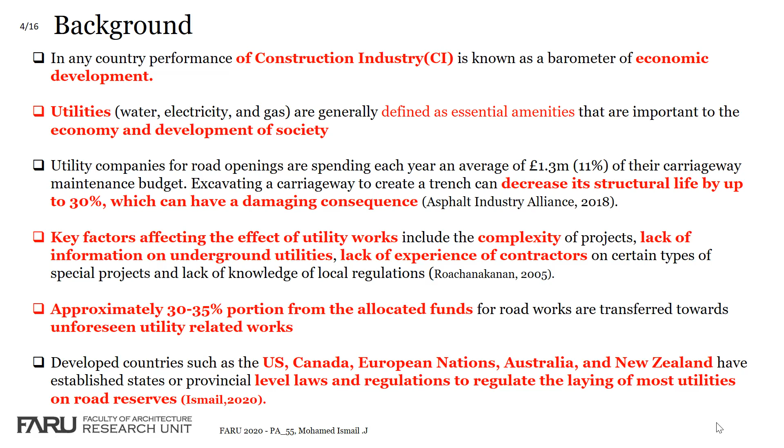Developed countries such as the US, Canada, European nations, Australia, and New Zealand do have well articulated laws and regulations to regulate the laying of most utilities on road reserve. Research problems: road projects are experiencing huge delays in Sri Lanka due to utility relocation, design changes, price escalation, and land acquisition. We are going to discuss mostly the issues with utility relocation and betterment works in this presentation.

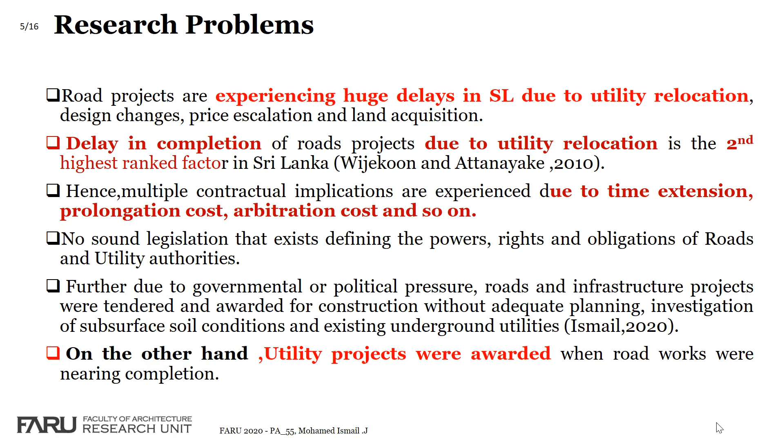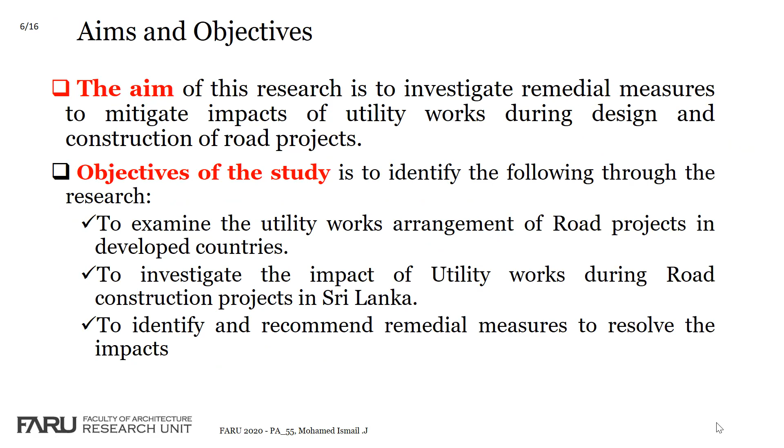Aims and objectives. The aim of this research is to investigate remedial measures to mitigate impacts of utility works during design and construction of road projects. Objectives of the study: firstly, to examine utility works arrangements of road projects in developed countries. Secondly, to investigate the impact of utility works during road construction projects in Sri Lanka. Thirdly, to identify and recommend remedial measures to resolve the impacts.

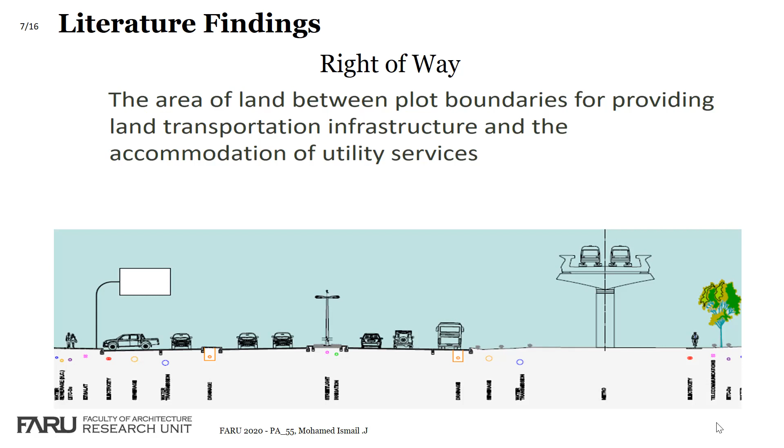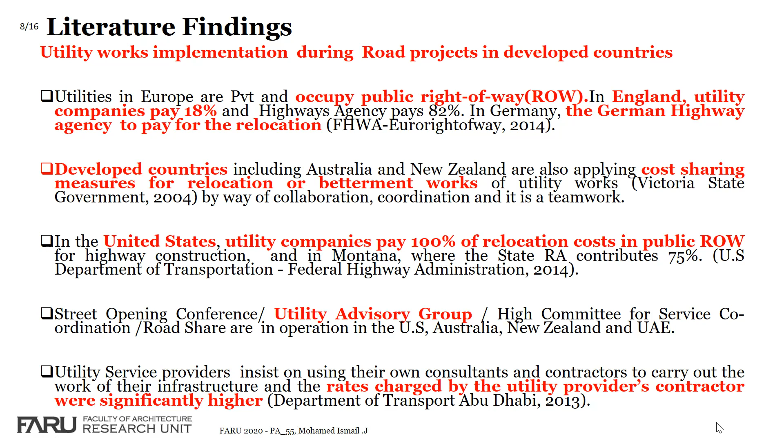They meet at regular intervals and discuss design and construction conflicts between utility and road projects. By doing so, they resolve many issues and end up in a win-win situation to complete the projects well on time within their budget. Utility service providers also sometimes insist on using their consultant contractors to carry out the work instead of road contractors being given to execute, and their contractors charge utility providers significantly higher than the rates of road contractors.

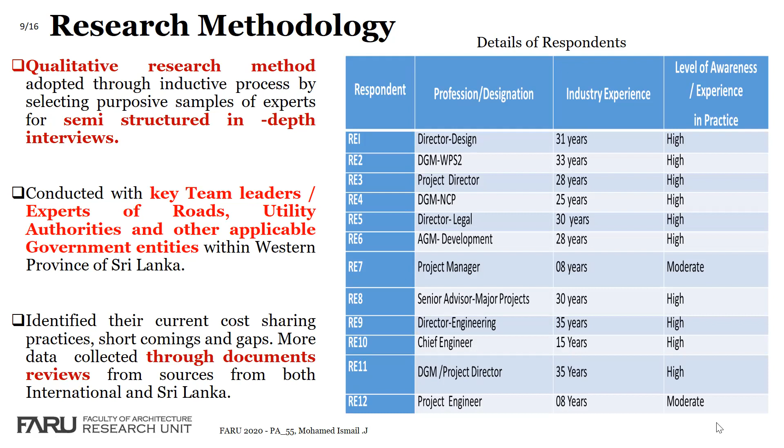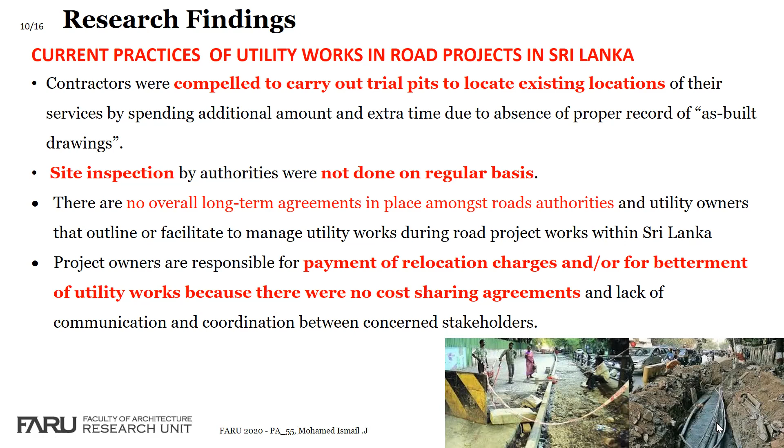Research finding, current practices: contractors were compelled to carry out trial pits to locate the existing location of services because as-built drawings were not available on most occasions with the utility agencies. Site inspection by authorities was not done on a regular basis. There is no overall long-term agreement in place among the road and utility authorities. All they have is an ad hoc agreement, which is not resolving the overall issues, and it is a time-consuming affair as well. Project owners are responsible for payment of relocation charges and or betterment of utility works because there was no cost sharing agreement and a lack of communication and coordination.

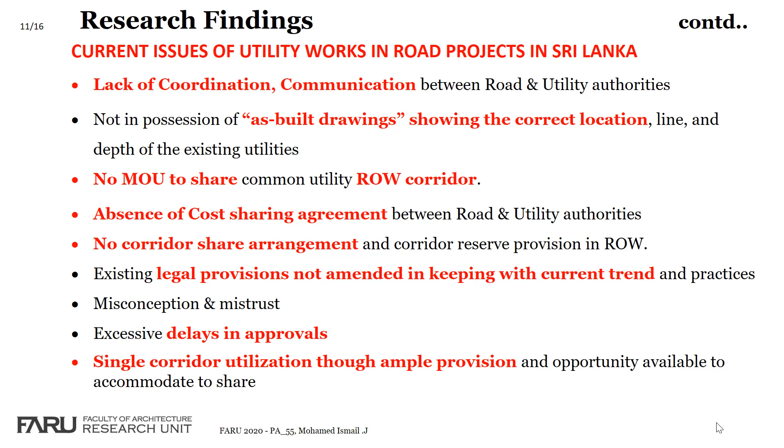Single corridor utilization though ample provision, which is in Japan: we have a single overhead pole which provides overhead electricity and street lighting cables and sometimes telecom cable also. So that is common corridor sharing, and utilities have coordinated their works in an accepted manner.

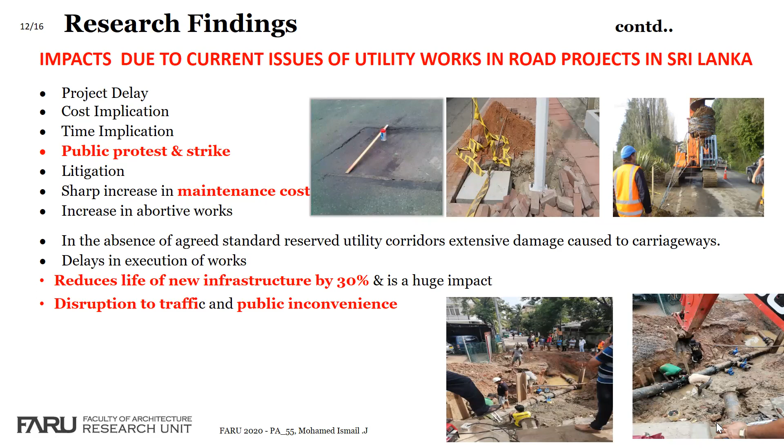Impacts due to current issues: project delay, cost implication, time implication, public protest and strike due to environmental and land acquisition matters, litigation, sharp increase in maintenance cost, and in the absence of agreed standard reserve utility corridors, extensive damage caused to carriageways, delays in execution of work, disruption to traffic, and public inconvenience.

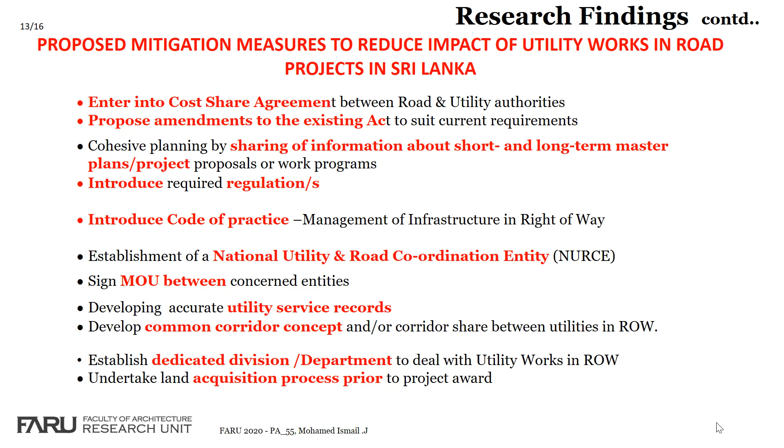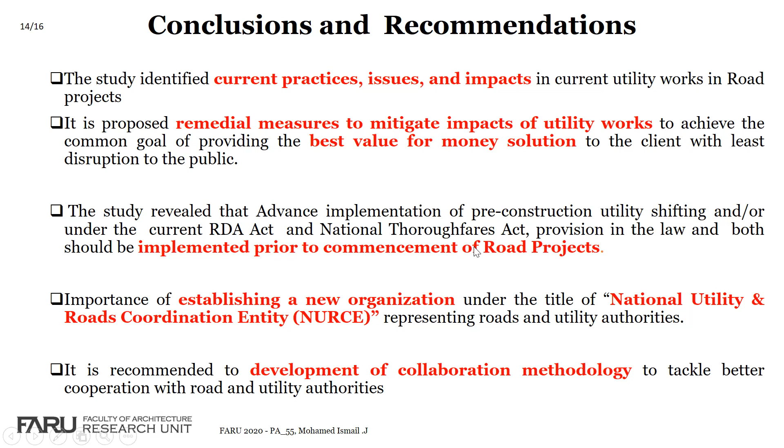Importance of establishing a new organization, which we dealt with earlier, the National Utility and Road Coordination Entity representing road and utility authorities, and it is recommended to develop a collaboration methodology to achieve better cooperation between road and utility authorities.